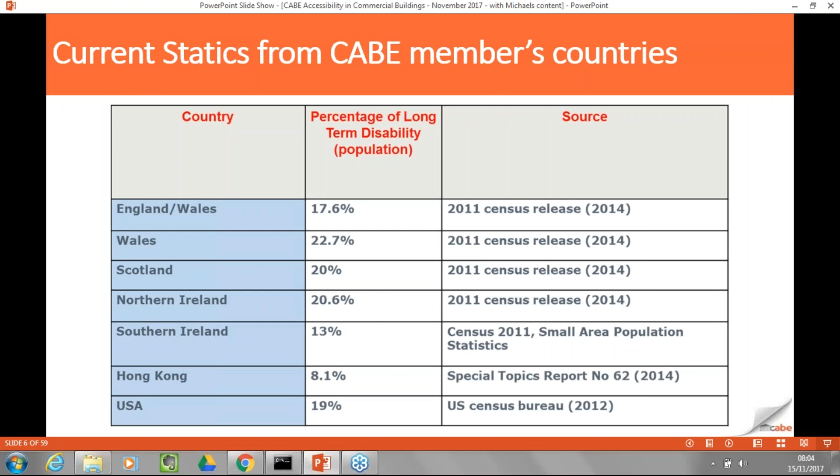...blindness, or other forms of eye condition, to those who may be partially or profoundly deaf. Some countries, like England, have moved away from singling out disabled and now create guidance that covers all in society.

Each country mentioned in the slide has appropriate guidance for members to refer to. In some cases, they may need to refer to more than one document, in particular guidance for stairs.

In preparing for this webinar, I have had the opportunity to slightly review these documents, and it is clear that in principle they're kind of the same, but there are some differences in how and what each country would consider appropriate. They say a picture paints 1,000 words.

With the guidance within the United States of America, it actually shows some of the best diagrammatical presentations of aspects relating to disability regulations.

So is there a difference in the legislation? Well, if we were to look at the United States of America, their requirements ensure that all buildings built or altered are suitable for those with a disability.

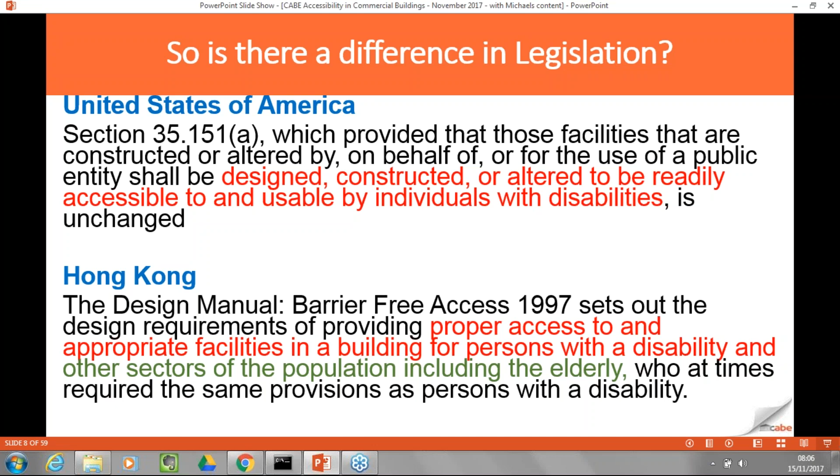The same can be said for legislation in Hong Kong. But it is interesting to see that in Hong Kong it includes the phrase 'and other sectors of the population, including the elderly.' When we look at Northern Ireland, it makes reference to the phrase 'regardless of ability, age or gender,' and that both buildings and the use of their facilities should be accessible for customers, visitors and people who work in them.

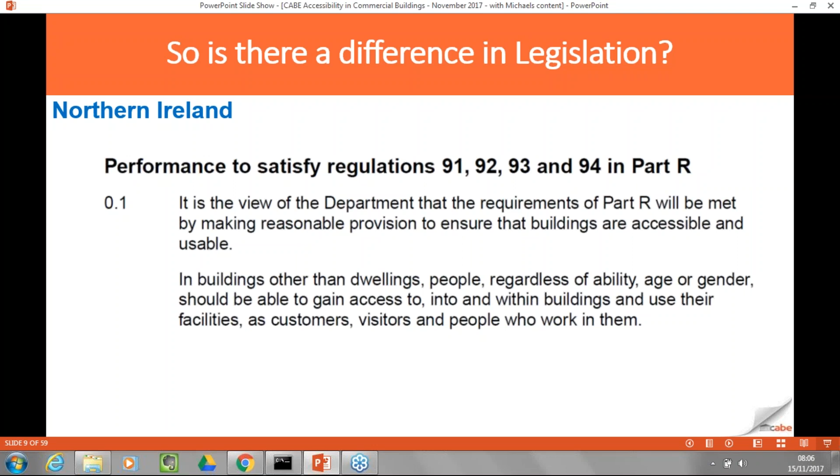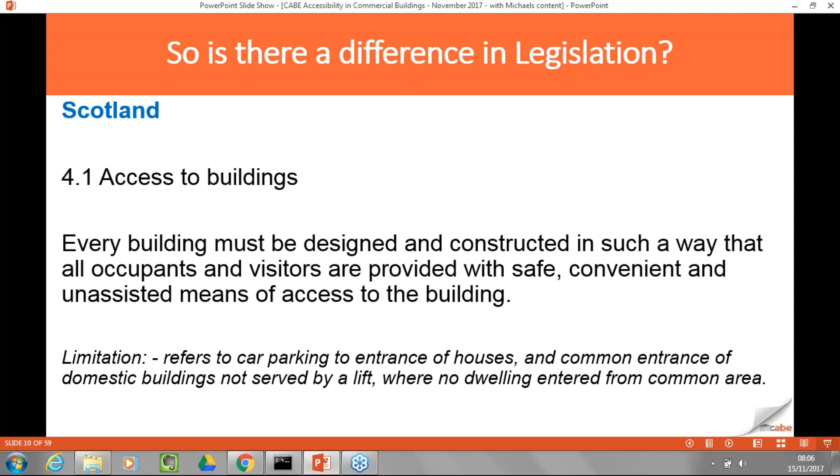When we refer to Scotland, they make reference to occupants and visitors. They go on to say, ensuring that they are provided with safe, convenient and unassisted means of access to the building.

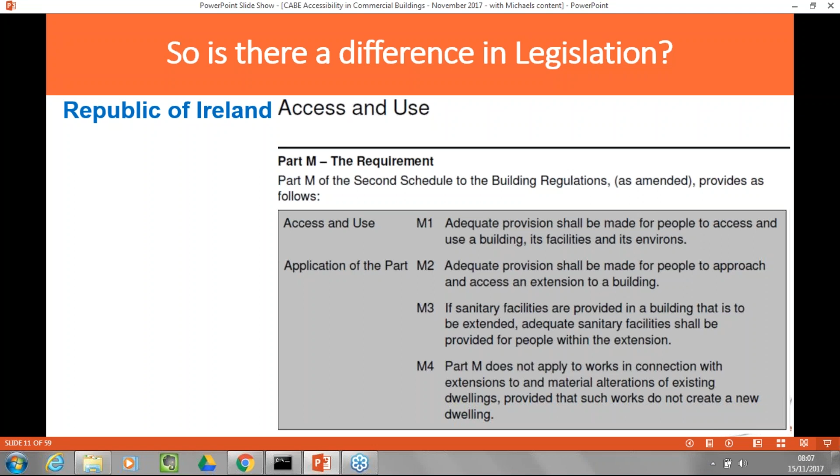Referring to the Republic of Ireland, theirs is very similar to England and Wales, where their breakdown of the legislative requirements into sections. And on this slide you can see how, again like England and Wales, they've broken theirs down into various sections.

Mindful of the fact that we have members from different countries taking part in this webinar, I've decided to offer a talk covering the principles of consideration when dealing with accessibility in commercial buildings.

During my research, I found that the Northern Ireland Technical Booklet R, in particular sections 2 to 6, to be very helpful due to the way in which it introduces various provisions for buildings other than dwellings, which in my mind I found to be clear and methodical.

As such, I'll be following the Northern Ireland route, and we'll start with ensuring suitable and convenient means of access to a building for people from the boundary or from a car park provided on site.

We will then consider aspects to assist people to be able to identify the building entrance and use it to enter the building easily, conveniently and without the risk of injury.

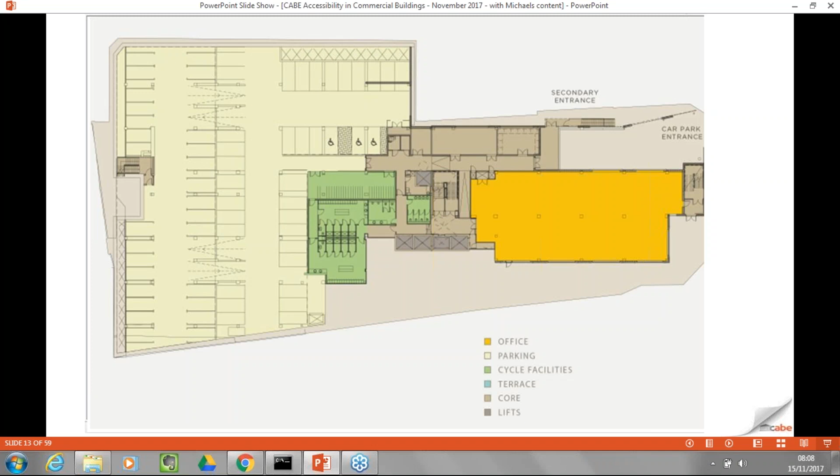We will cover the facilities of movement of people within the building, both within a story, horizontal circulation, and between stories, which is vertical circulation.

We'll cover considerations to ensure people have access to the use of all facilities within the building, and this of course includes sanitary accommodation and other facilities.

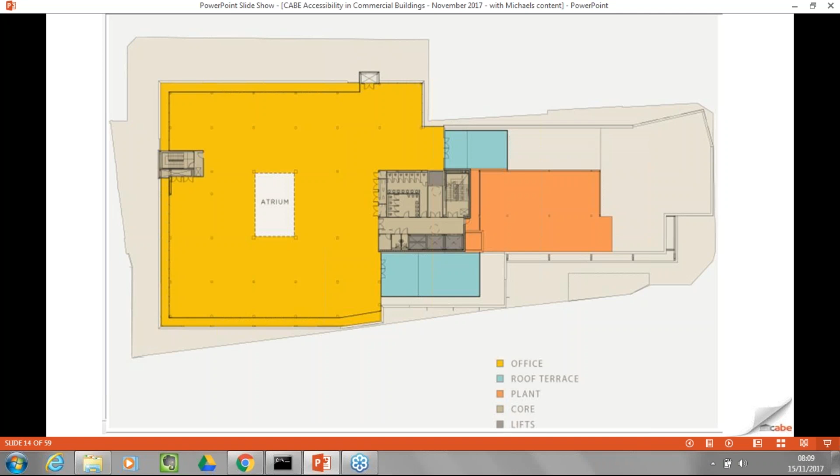One last item is we'll lightly touch upon means of escape and lift provisions. Going back to our ground floor plan, I would like now to focus on the car parking area.

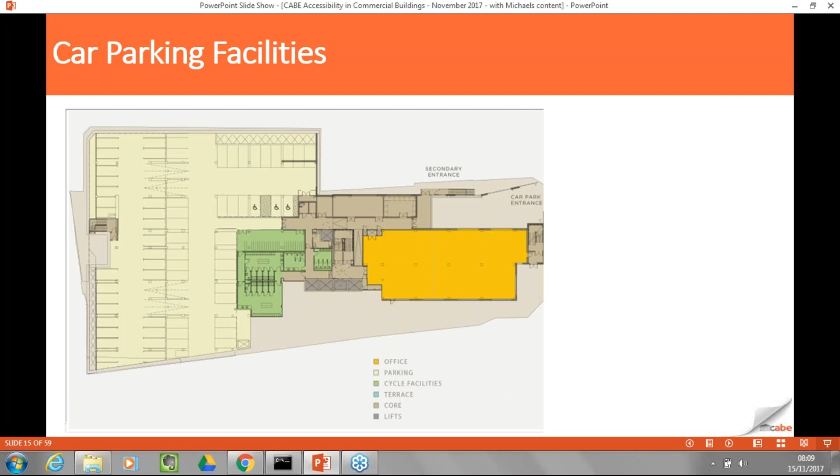From reviewing the various documents, it is clear that they all have different diagrams to show compliance, and in some cases different sizes. Nevertheless, all appreciate the need for suitable space, and that's around 1200mm either side of the car parked vehicles. The design is to cater for either left or right-handed abilities.

Further guidance for the UK and Southern Ireland could be found within the British Standard 8300. It is noticeable that in Hong Kong, the size of parking bays is slightly smaller.

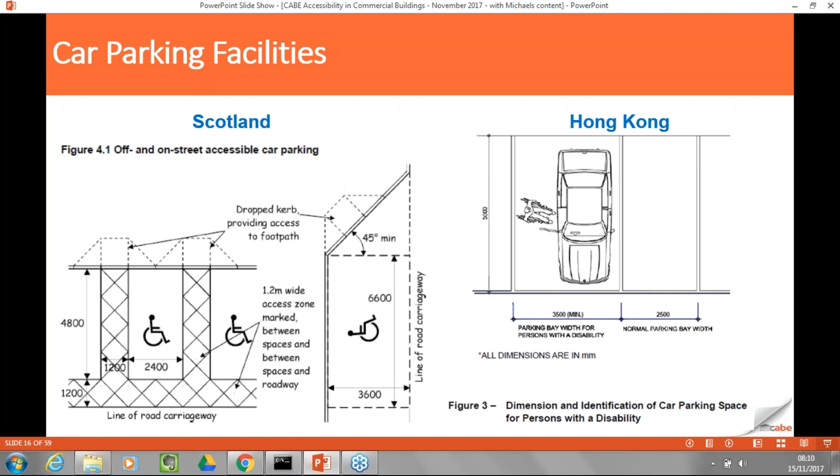When referring to the United States of America, they tend to use dimensions in imperial measure. But when you translate it to metric, 11 foot equates to 3.35 meters for the width of a van. The access aisle, which they've shown as 5 foot, is 1.52 meters. It's clear that in the United States they have a larger requirement for disabled parking spaces.

Approved Document M also offers guidance for those who have to use ticket machines, and setting down points are clearly identified close to the principal entrance, as can be seen from a slide taken at the CABE headquarters.

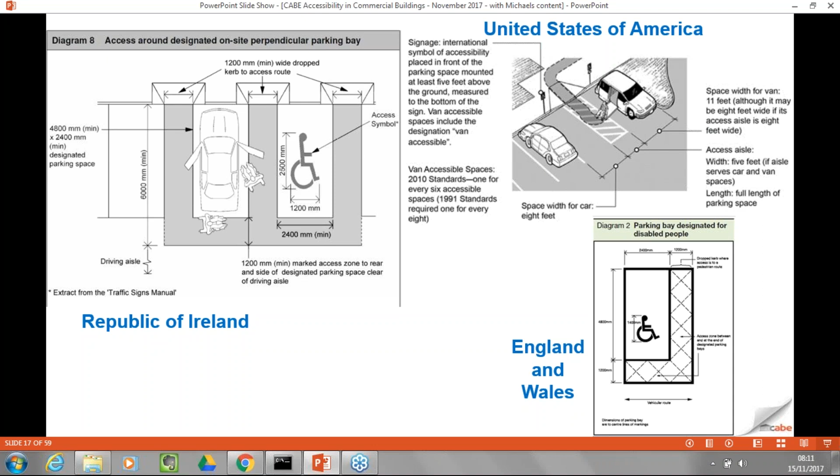When parking is offered, Approved Document M states that at least one space should be designated to accommodate a disabled bay. It is interesting to know that some of the other countries require more than one parking bay. Both Hong Kong and United States of America offer a sliding scale, and the number of bays depends on the number of cars.

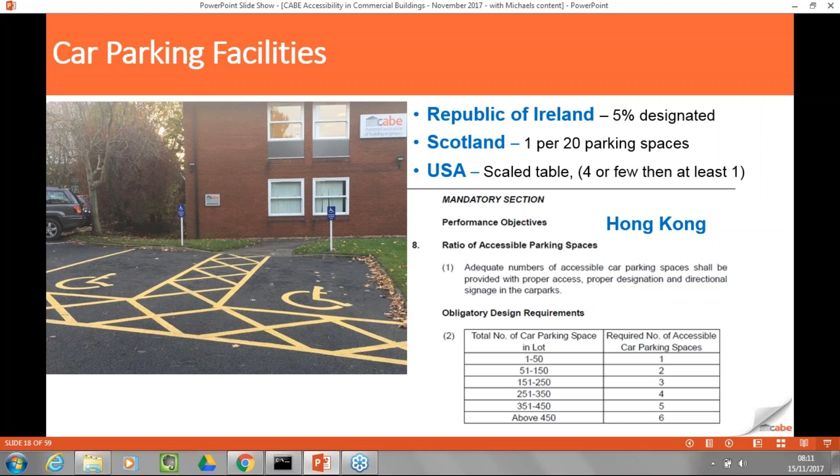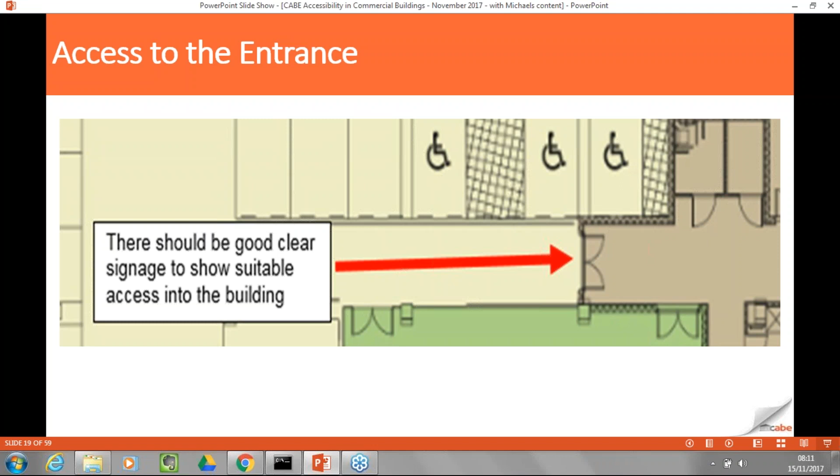As mentioned previously, the principal entrance into the building should be clearly identified from where a person may park their car or from the boundary of the site, to ensure that people entering the building do so through the right door.

The route from the car park or from the boundary of the site for those who didn't journey by car should be level with a firm hard standing that is slip resistant. Consideration should be given to ensure there is no standing water which could freeze or create discomfort by people getting their hands wet. The route should also be well lit with appropriate lighting when daylight begins to fade.

The clear width needs to be 1.2 within Approved Document M, the Scottish Technical Handbook, and the Northern Ireland Technical Booklet R. There is also mention of 1.8 where wheelchairs are likely to pass others. In Hong Kong, the requirement is 1.50, and in the United States, they're looking for 915 millimeters with a turning circle of just over 1.2.

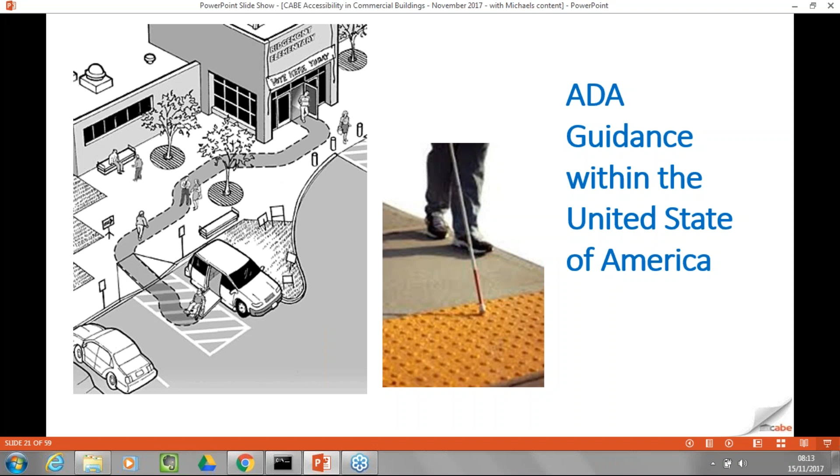Another point that needs to be considered is the use of tactile surfaces where necessary. Consideration should also be given to ensure that the clear width is free from obstructions like stairs and doors opening across the route without barrier protection.

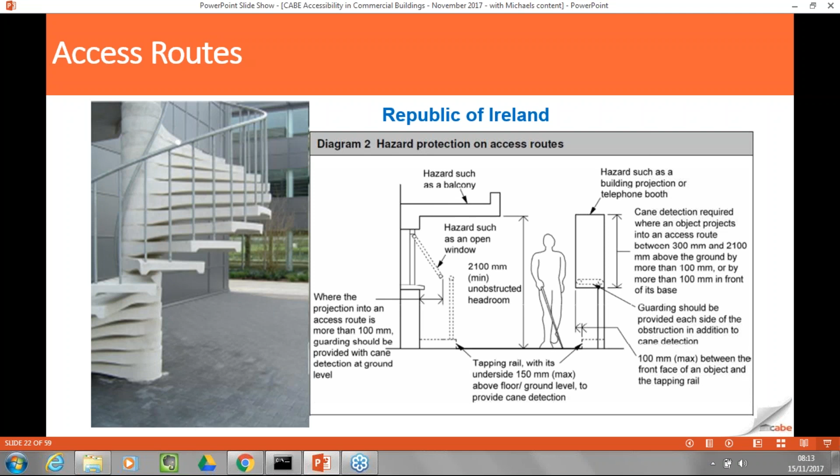In addition, any projection and opening from a building, you should be mindful of the position of landscaping, planters, and seating that could cause an issue.

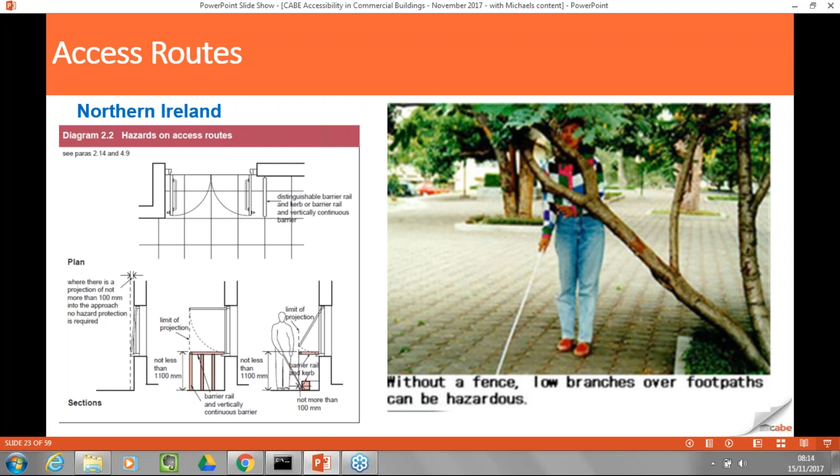There is some English guidance within the Department for Transport. This document can be downloaded from the website, and it clearly shows the dimensions that we need relating to the abilities of the person who's using them.

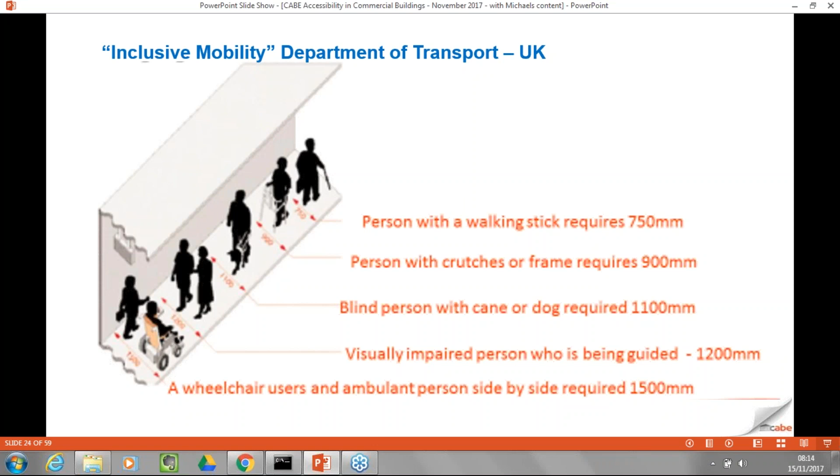I found guidance within the Hong Kong legislation. This guidance shows that level access routes, which accommodate the widest range of abilities, should be provided, but there is consideration needed when a ramp is required.

For the purpose of Scottish and Irish regulations, a gradient of 1 in 50 or less is considered to be level. The more gradual the slope of the ramp, i.e. the less steep it is, the more easily people can use it without assistance.

Therefore, slopes with a ratio of 1 in 20 (5%) to 1 in 15 (6.7%) are preferred. It can take much energy to get up a ramp with steep gradients, which also makes speed control difficult when going down.

The diagram from Hong Kong, I believe, is one of the best I've seen in understanding the gradient requirement and the need for gradients. 1 in 20 or steeper is considered to be a ramp. Scotland, Hong Kong and the USA state not more than 1 in 12.

Approved Document M states that where a ramp is provided, suitable stepped access should also be offered. The design of the ramp should also include handrails on both sides as well as edge protection.

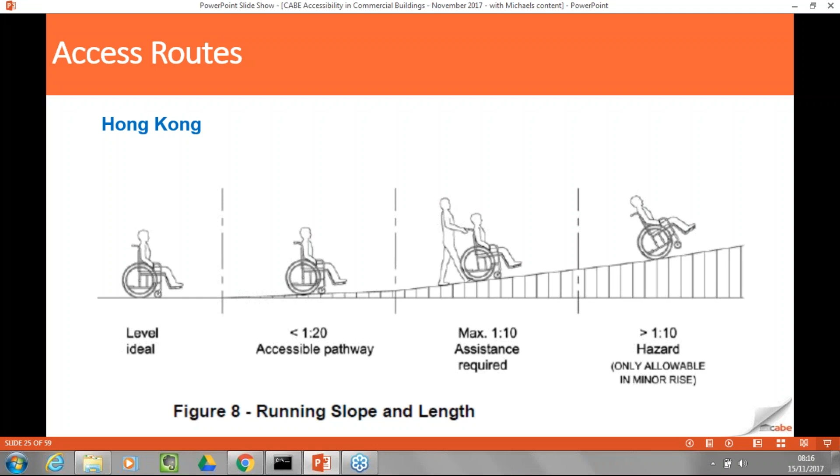There is plenty of guidance with regards to entrance doors, from the width required to the provision of tactile surfaces, within the Hong Kong guidance. There is also a difference in the required width which some countries allow.

Nevertheless, the doors that lead to the principal entrance of a building should be clearly identified and easy to operate manually.

Consideration should be given to those who may have limited physical dexterity, and as such, doors should be power operated under manual or automatic control.

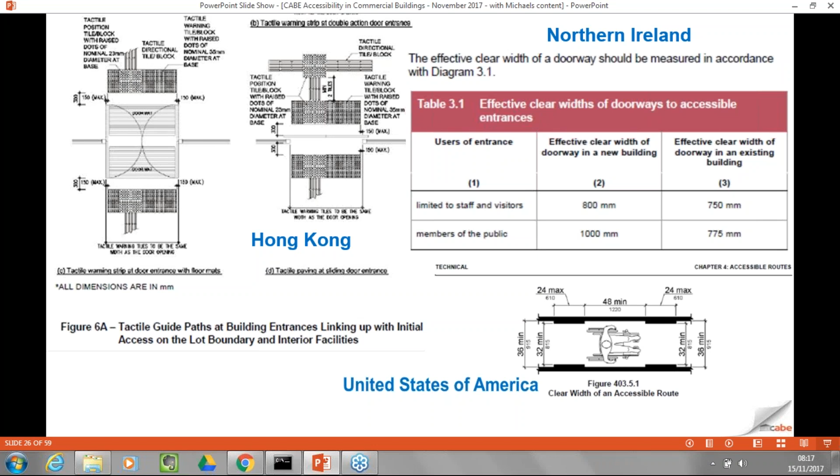There is guidance on the force required to open a door, and this is generally 30 newtons from a closed position to the first 30 degrees, and 22.5 newtons for the remainder of the swing. This is the same for the guidance in Hong Kong, whereas in America, the guidance only relates to 22.2 newtons.

When providing a power operated door, it is important to consider the location of the control panel which operates the door, since you need to ensure adequate time to operate the device and then travel to and through the doors. Ideally, this should be within 1.4 meters away from the door.

All guidance documents which I've seen have clearly stated that disabled access via revolving doors should be discouraged. Within the United States of America, their guidance shows the provision of an auxiliary door, which is something other guidance documents also encourage.

Sometimes it's not always possible to have a level entry into a principal entrance, but a good, clear alternative entrance for disabled people is considered acceptable, so long as when they arrive at that entrance, which they've been routed to, the reception area is clearly marked.

In some cases, it is possible for disabled people to seek assistance to enable them to enter the building. Clearly, this offer needs to be fully managed, and appropriately trained staff should be made available with appropriate equipment or the ability to direct people to a suitable alternative entrance.

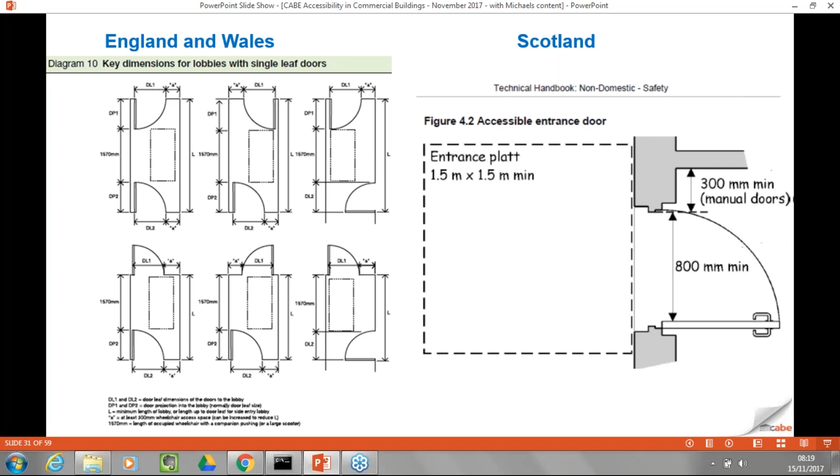This can be seen clearly within the United States document, which offers graphical guidance on what is suitable for a door entry. Just to help you out, 48 inches is 1.21 meters, which is slightly less than the UK building regulations of 1570mm plus DP1 plus DP2. DP1 and DP2 being the two doors either side of a lobby.

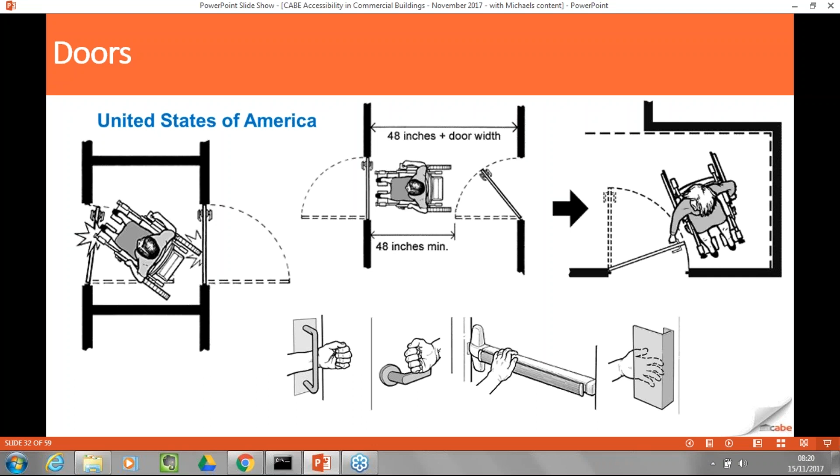Door handles are also important due to people's dexterity and ability to operate, due to either loss of digits on their hands or the hand itself. The American guidance below shows different types of door handles that should be used, which rely on fist, palm and forearm operations.

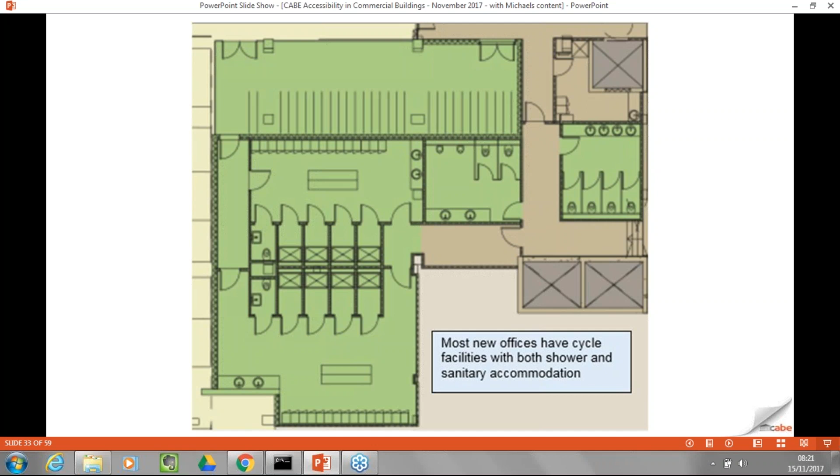Sometimes in commercial buildings, there's a provision to provide shower facilities. When you are providing shower facilities for cycle use, consideration should be given to ensure that those with a disability also have the ability to use a shower facility.

Not all guidance requires a shower facility to have sanitary accommodation, but if not, then suitable sanitary accommodation shouldn't be too far away. When looking at such sanitary accommodation and facilities, you need to consider the provisions for emergency alarm reset buttons, as well as flashing beacons and emergency lighting.

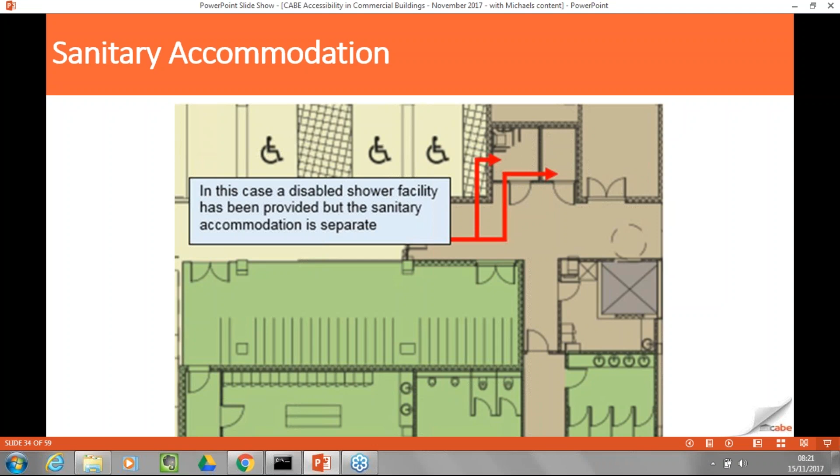The Republic of Ireland, in their guidance, bases their provisions on a turning circle of 1800 for wheelchairs. They also have a provision for 1500 wheelchairs. The space provision will be adequate for many wheelchairs; however, some powered wheelchairs and scooters may require a larger turning circle.

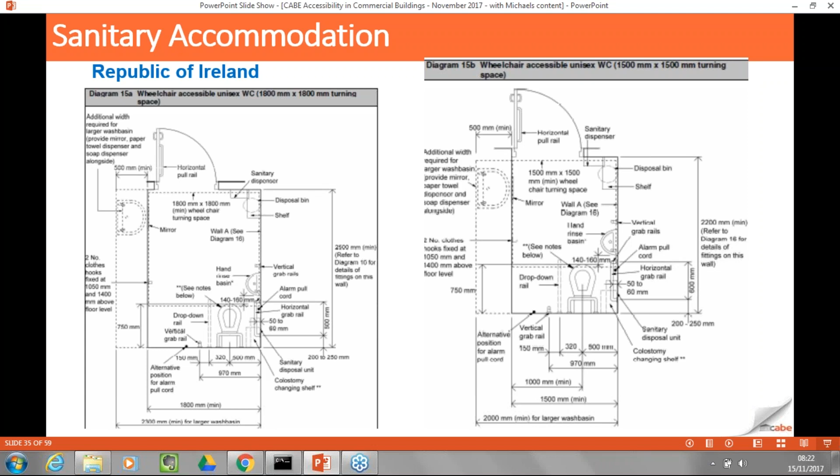Within the Republic of Ireland, buildings with a net floor area greater than 200 square meters require the 1800 turning circle. Buildings with less than 200 square meters will require a turning circle of 1500.

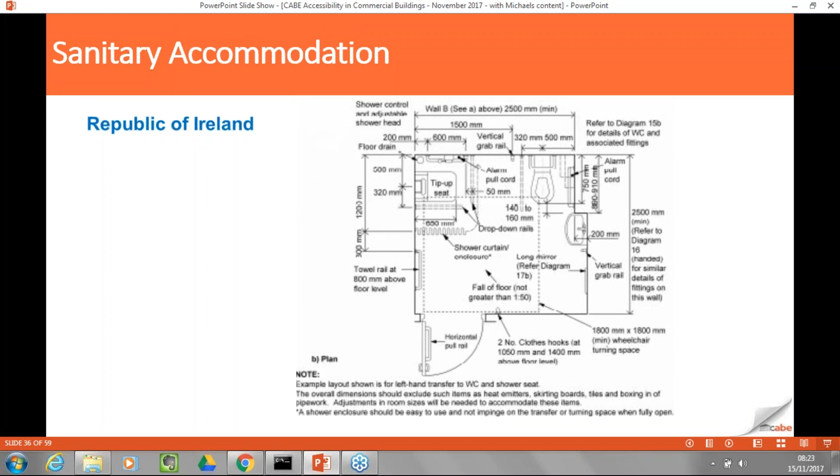In the Republic of Ireland, they also show guidance where a shower is incorporated within the sanitary accommodation. The Irish guidance offers details which are very much different to that within the UK guidance.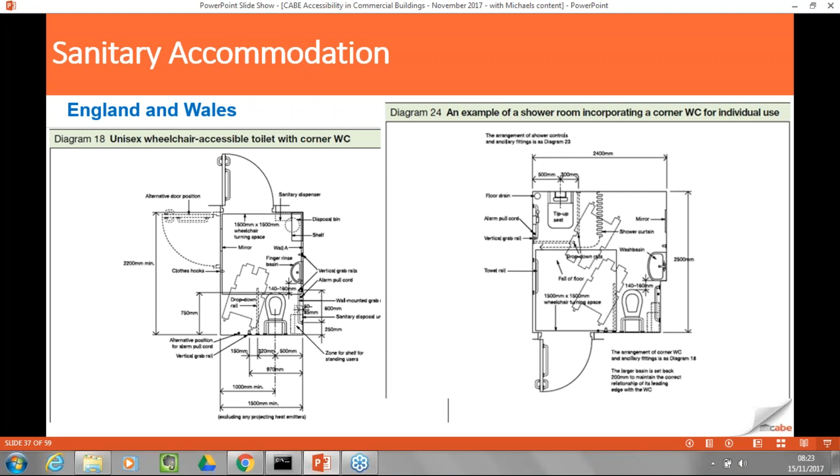In Hong Kong, at least one accessible WC cubicle should be provided on a floor, or in that part of the floor designed for access by a person with disability. If the total number of WCs on a floor is 20, then you should provide at least 2 WCs for disabled people.

Within their own guidance, accessible WC cubicles shall be no less than 1500 by 1750 in area, and a clear manoeuvring space within the cubicle shall be no less than 1500.

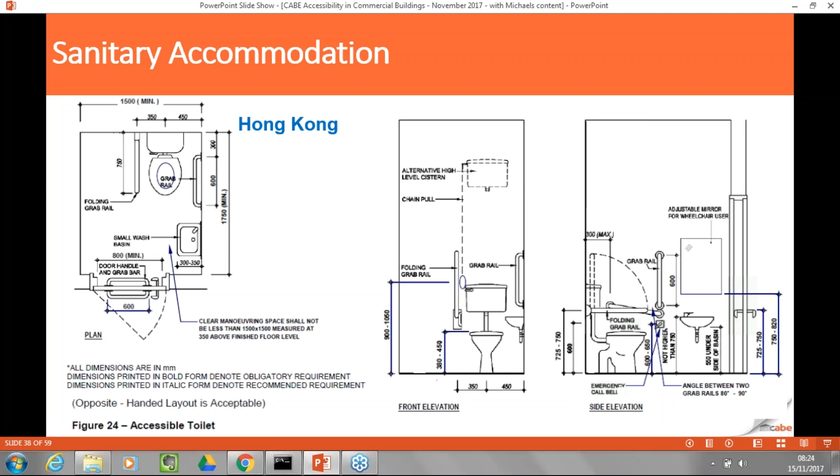In Scotland, the requirements are found within the Environmental Technical Standards. For their technical standards, accessible WCs should be no more than 45 meters away, but you're allowed to use a lift to travel no more than 1 storey. That requirement also relates to England and Wales.

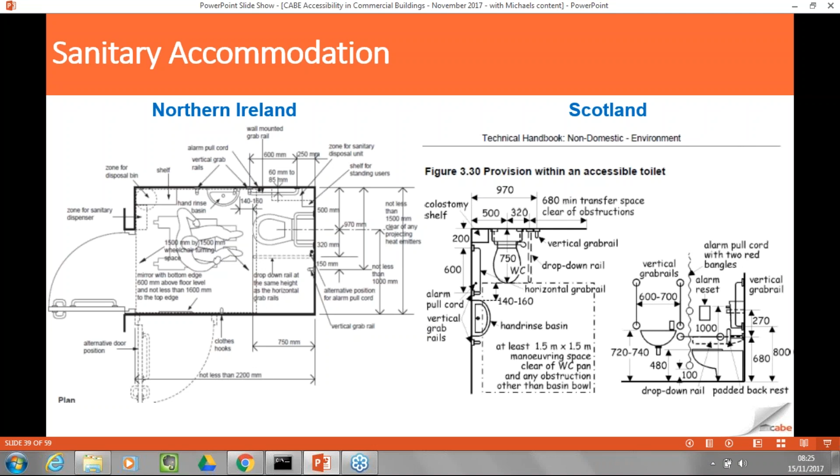For Northern Ireland, there is sanitary accommodation for visitors, customers or staff. At least 1 unit of unisex wheelchair accessible sanitary accommodation should be provided. When looking at a bank of sanitary accommodation, at least 1 of those units, in a bank of 4, should have an ambulant disabled facility provided.

Within the common area of the toilet facilities, the common lobby, you'd need to have flashing beacons and emergency lighting. On the picture that you see, I've made a note about the provision for a refuge point. Within the disabled refuge point, there should be a means of communicating with others. This tends to follow within the fire safety requirements.

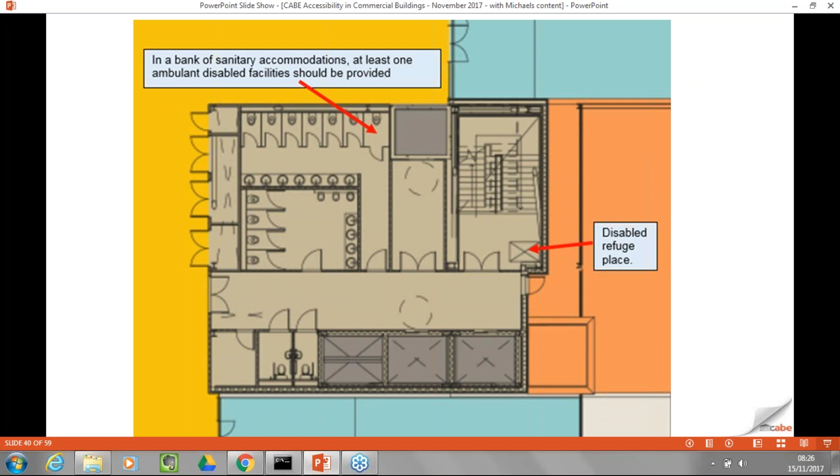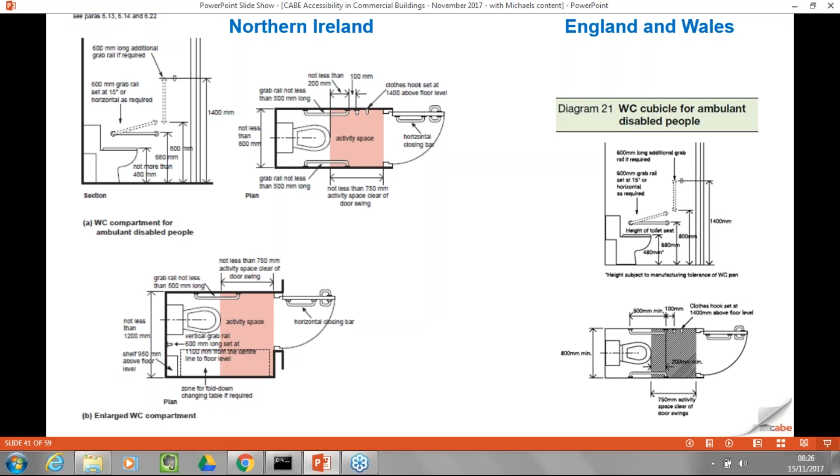There's guidance both in Northern Ireland and within England and Wales which refers to the provisions for ambulant disabled toilets. As mentioned in the British Standard 6465, the statement there is that where you have more than 4 toilets, at least 1 of them should be an ambulant disabled toilet.

Looking at the United States of America, their guidance states wheelchair accessible compartments should be at least 1525 by 1420 deep. There's diagrammatical guidance as to what that looks like and how it would actually operate.

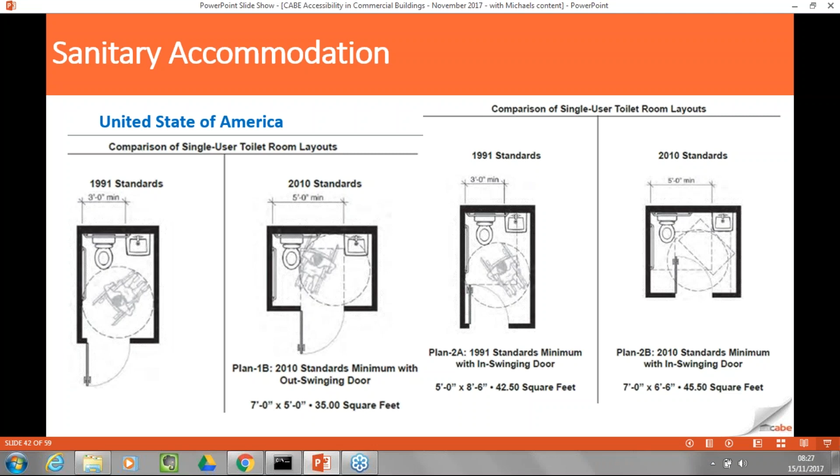One of the factors as to why we tend to ask, in the UK legislation, for the washhand basin to be close to the pan is to enable a person to move from the pan to use the washing facilities without contaminating their wheelchair. It's about ease of use.

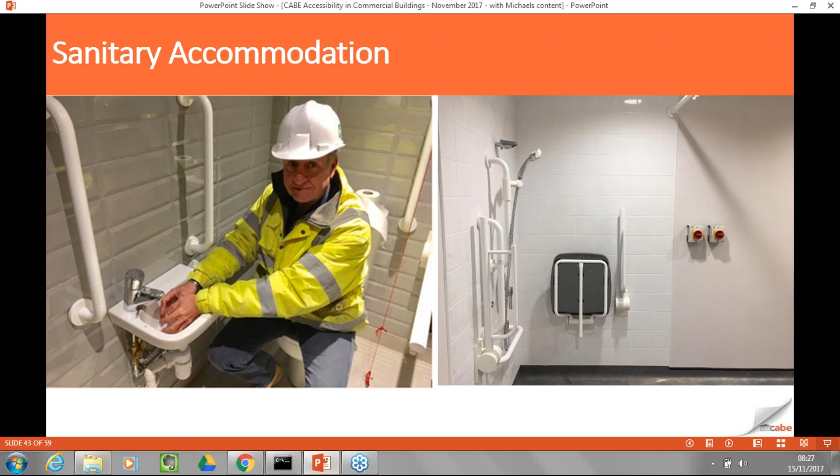The picture on the left brings up the item about contrasting colours. It's an item that will be covered later, but it's important that we do have contrasting colours and ensure the facilities are suitable. There are a number of things wrong with the picture on the right, and likewise there are a number of things wrong with these pictures. If you can find out what the answers are, put them on a postcard and send them to CABE.

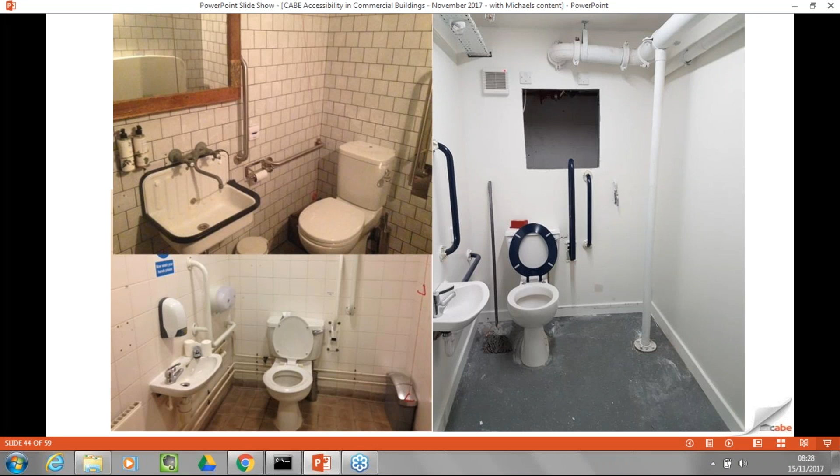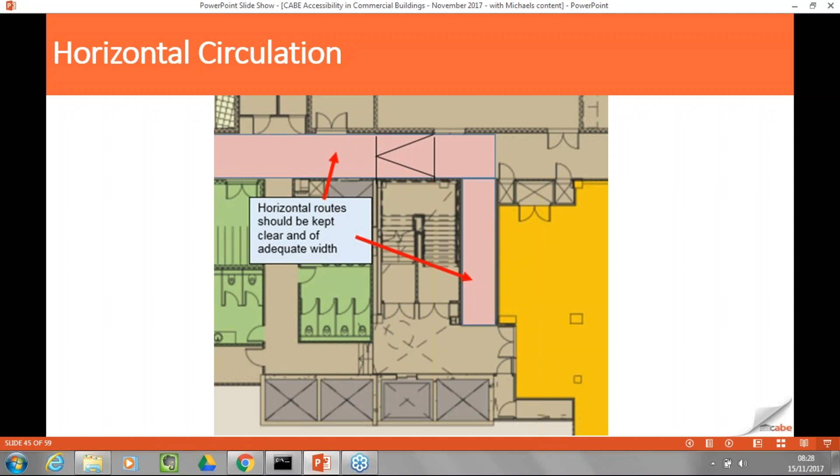Moving on to horizontal circulation. Clearly the horizontal routes should be kept clear and there should be an adequate width - at least 1.2 clear width should be provided, with at least 1.8 to enable wheelchairs to pass.

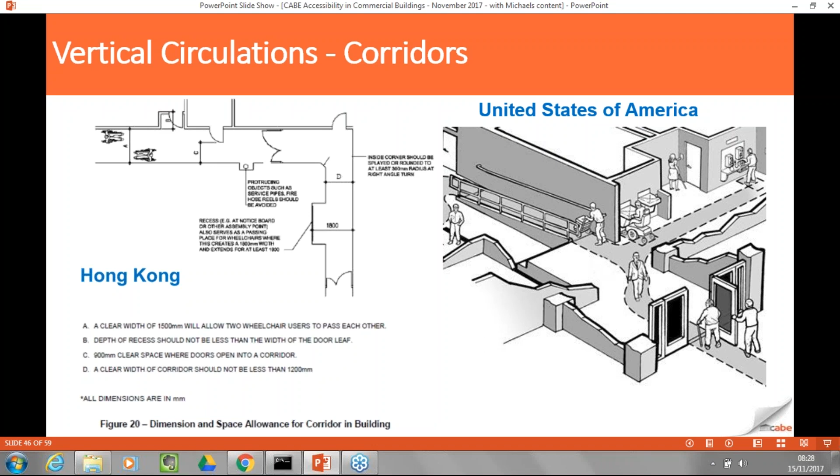There is plenty of guidance within the various documents in various countries, but in essence it can be summed up as: a clear width should be provided, routes should be free from obstructions, level, and have slip-resistant flooring. They should have good contrasting colours between walls and floors - we're looking at a 30-point difference - plus good lighting with sufficient lux and good acoustics.

Where you have doors on the circulation routes, these doors should have vision panels and no door should open directly onto a corridor, creating a potential hazard.

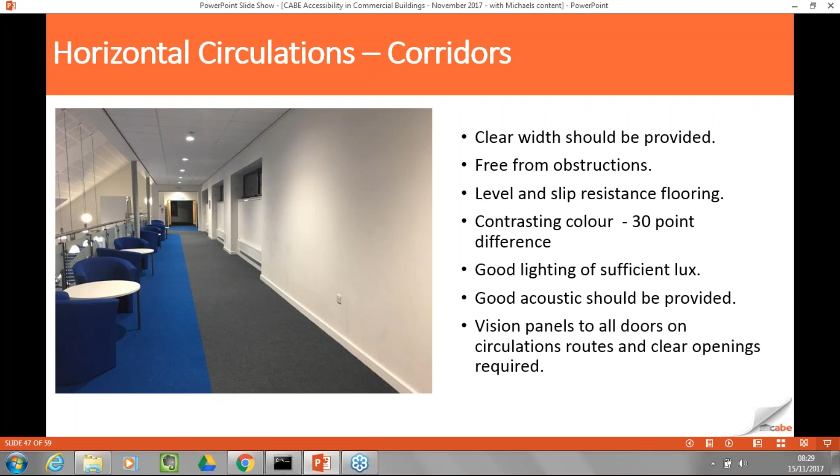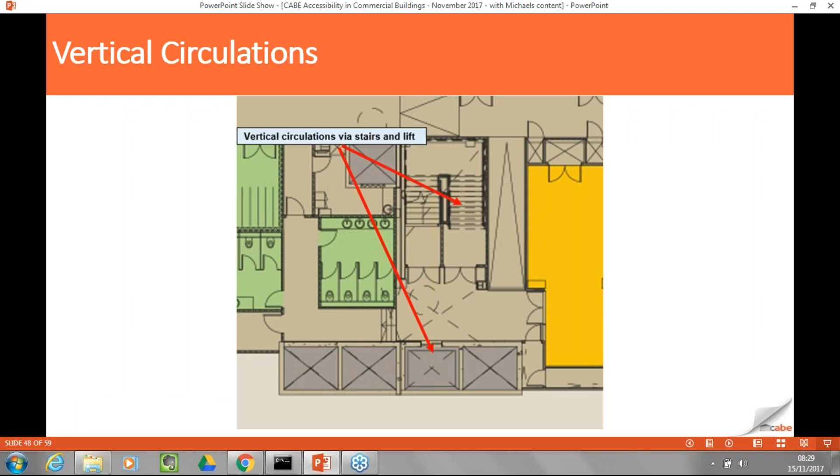Moving on to vertical circulation, in particular stairs and lifts, I've summed up the guidance from the various countries that I've referred to. It's interesting to see that two have a minimum rise of 100 mil, and most accept 12 rises, but are happy to increase to within 16 or 18 with different goings.

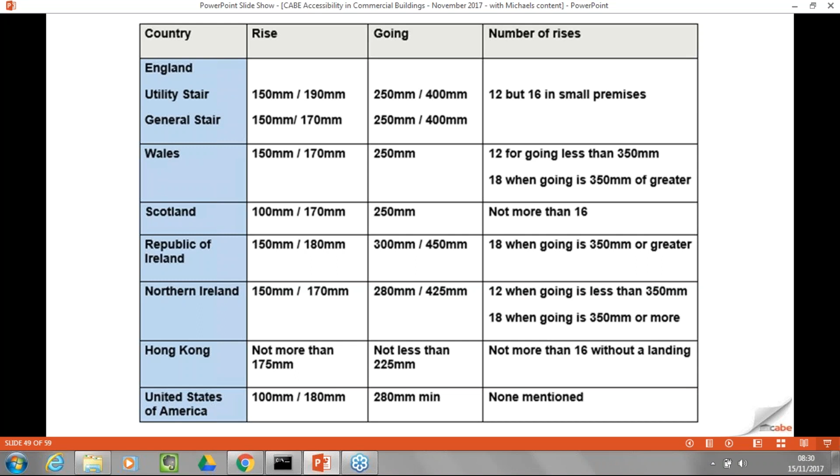England is the only country that has actually split its stair provisions into utility, which refers to use for escape and access for maintenance, and general, which refers to users of the building on a day-to-day basis. But in essence they've got the same sort of rise and going that's needed.

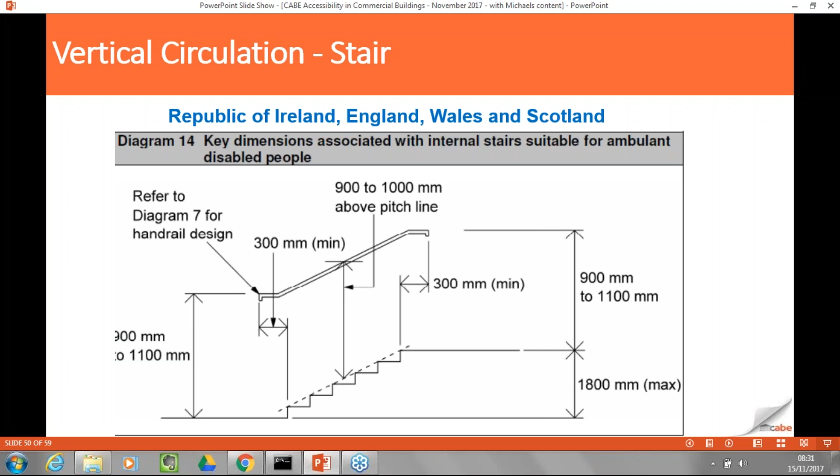Stairs themselves should have good contrasting nosings to the rise and goings. The rise should be designed so it doesn't cause a hazard for those who use a walking aid or a stick, or those who may have a brace on their legs. In addition, spiral and open rise stairs are discouraged due to the impractical nature of their design for those with disabilities.

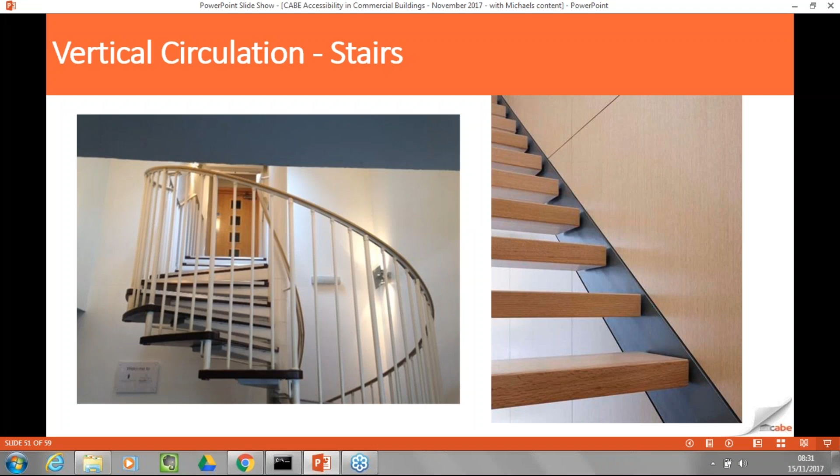Coming back to stairs, we also need handrails on either side, and the height of those handrails on the pitch line and on the balustrade is detailed in the guidance. Both Scotland and Hong Kong offer additional guidance on stairs within their documents.

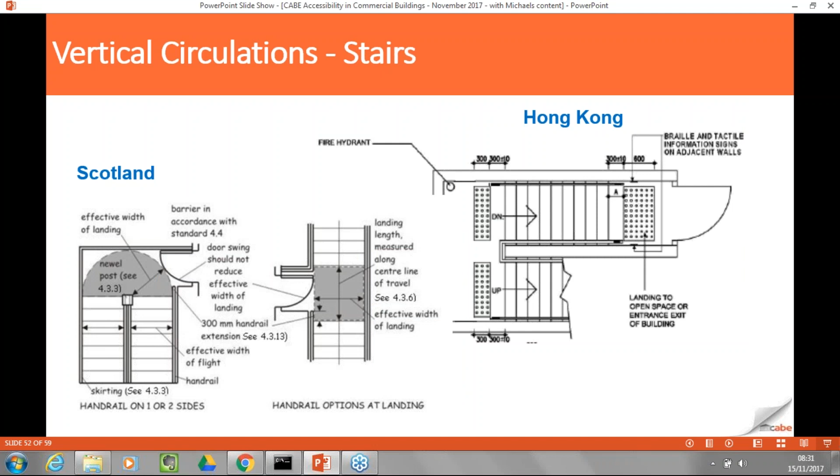Handrails have various sizes, but essentially one is required either side of a stair or ramp condition. They are there to assist people using the staircase. Effective handrails are ergonomically designed so they can be used by all people, especially those with an impairment to their arm or hand.

The handrail itself should be smooth and comfortable to use by people with arthritic hands and should not be too small in diameter. The idea is that a person should be able to grasp the handle.

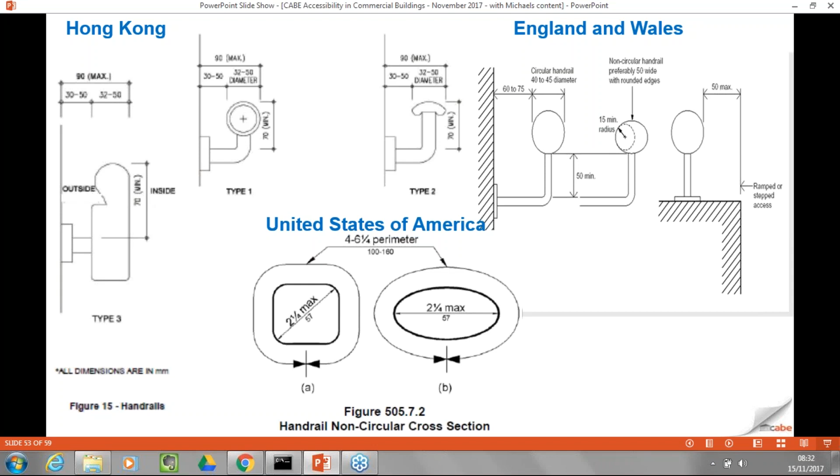One of the requirements in UK legislation is that handrails themselves should extend 300 mil after the last step and should have the ends turned down such that they do not cause an injury.

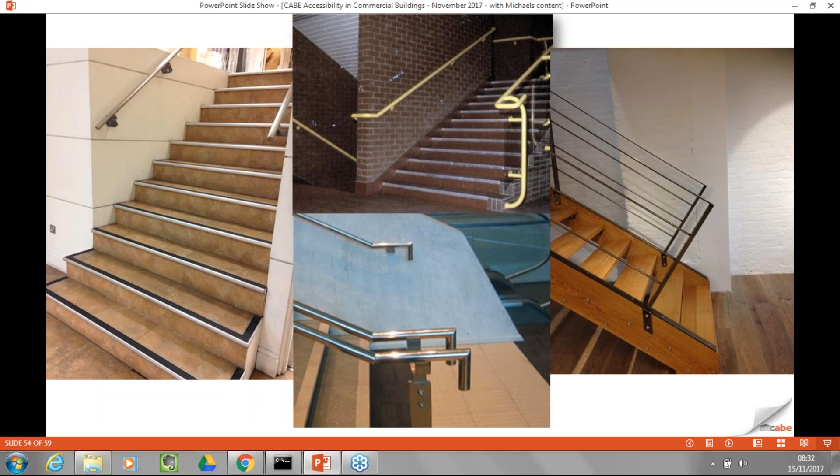There is a lot of information around the provisions of lifts, from the design to size and the control functions. Each country has its own guidance, but some of the common features are the height of the control panel - mainly no higher than 1200 mil - and a good sized car.

In Hong Kong, the requirement is 1.2 by 1.1. The size of a car is 1.3 by 2.03. And in the UK, the requirement is 1.4 by 1.1.

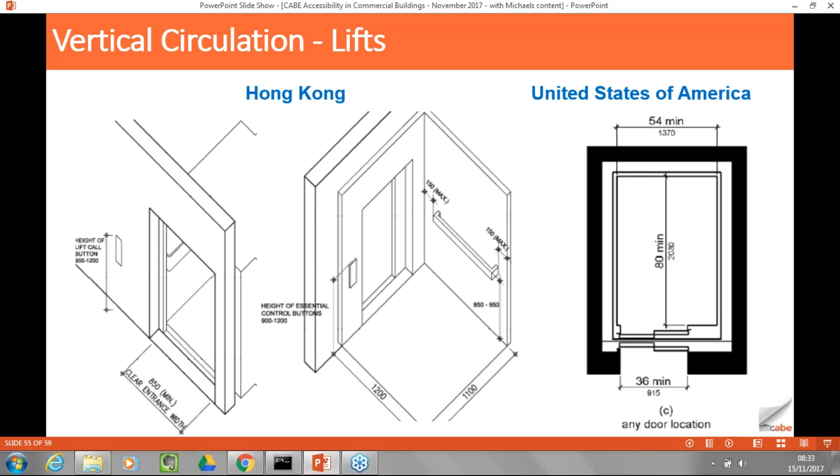Referring to facilities, there is plenty of guidance on the size and height of reception desks and tea points and workstations. Generally, they are required to have a good knee recess and a height of not more than 750mm.

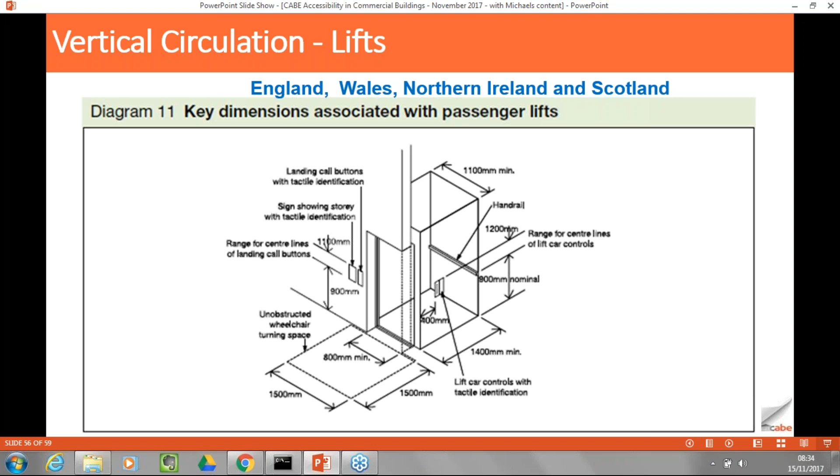Within the UK legislation, there is a requirement for an induction loop system. In most cases, the UK legislation does allow for access statements, where the design proposal varies from guidance, and relevant information extracted from the project access statement may assist in determining compliance. Unfortunately, such a statement provision does not exist within Hong Kong or the United States of America's guidance.

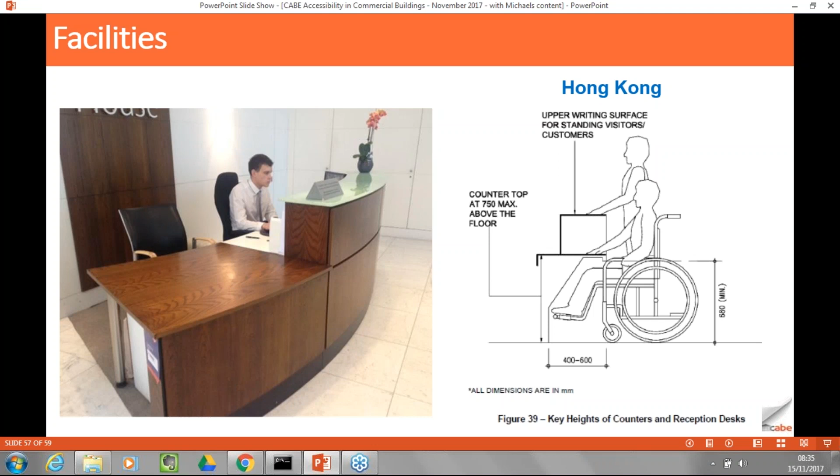That brings to the end my presentation on the accessibility of commercial buildings. Thank you.

We've actually got some questions that have come in, if you're able to answer them. A lot of them going back to early in the presentation, but there was a question regarding parking bay sizes and the fact that they're different. Do you think that the difference in sizes in Hong Kong and USA reflect the size of the vehicles in those countries?

It may. I think in America they tend to use vans, and there's a lot - when I was looking for the guidance, there was a lot of reference to vans, and I presume that's the larger size of vehicles. Those in the UK will know that parking bays generally in supermarket car parks are rather limited in size. So yeah, potentially, I think it is to do with the size of vehicles.

Great, thank you. The next question is, what is your view regarding the maximum force required to open the door and the need to fit self-closers, which in a fire situation may offer more resistance? I probably didn't make much sense there - what is your view regarding the maximum force required to open the doors and the need to fit self-closers, which in a fire situation may offer more resistance?